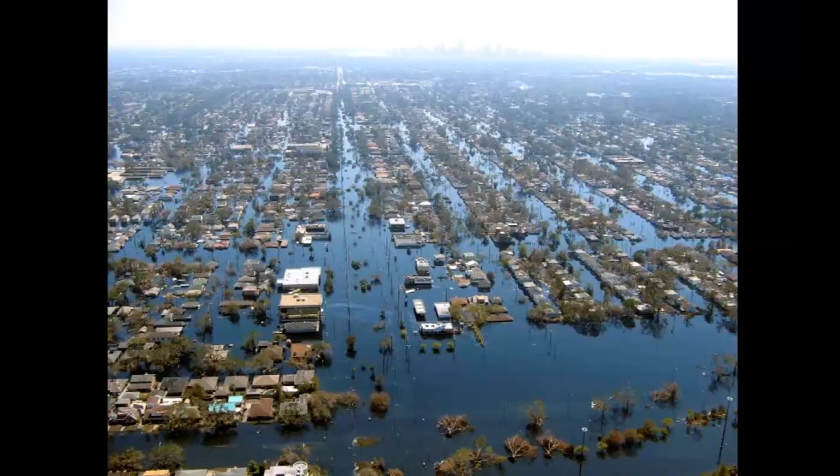Just as way of background, I was one of 3 full-time faculty at the LSU Hurricane Center in Baton Rouge when Hurricanes Katrina and Rita hit. And I was there doing research on wind effects on buildings, but by the time I left LSU 2 years later, I was mostly working on flood mitigation.

So let me start by defining amphibious architecture. What is it? Well, it's a term that refers to buildings at this stage, mostly small houses, that sit on dry land like an ordinary building, except when a flood happens, they float on top of the water. They go straight up, sit on top of the water as long as it's there, and then come straight back down. And they do this by having a buoyancy system under the house.

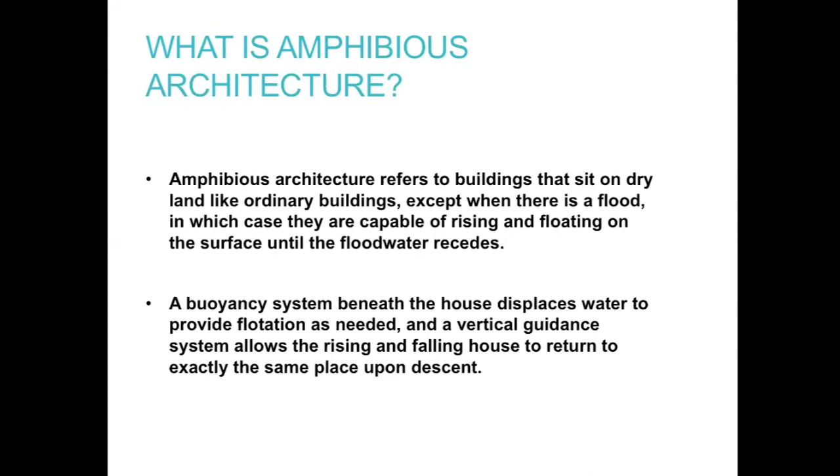And buoyancy system just means that it's something that will displace water in order to lift the house and keep it on top of the water. And they also have a vertical guidance system, which is something that only allows the house to go straight up and then straight back down. So it can't go sideways, it can't move anywhere off of its footprint. It just goes straight up and comes straight back down.

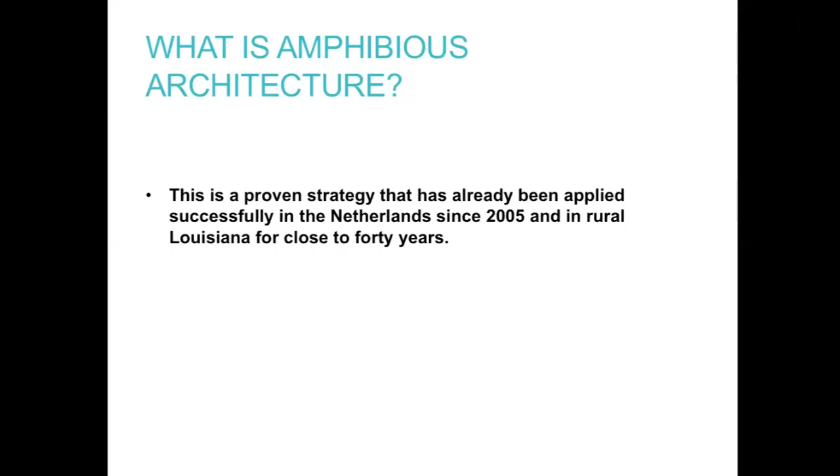So we have seen amphibious construction in the Netherlands, quite well advertised since about 2005. And under the radar, almost completely under the radar, there has been amphibious construction in rural Louisiana for close to 40 years. And I'll be showing you some examples of that in a few minutes.

And one of the things that I particularly like about this mode of flood mitigation is that it works in synchrony with the natural cycles of flooding. It doesn't try to stop the water. It doesn't try to make the water do anything other than what the water wants to do. And so it allows Mother Nature to do what Mother Nature wants, and we do the adaptation rather than asking Mother Nature to adapt to us.

So in that sense, it's a much, much more sustainable solution than what we often use now, such systems as dams and levees and dikes that change the way the water moves.

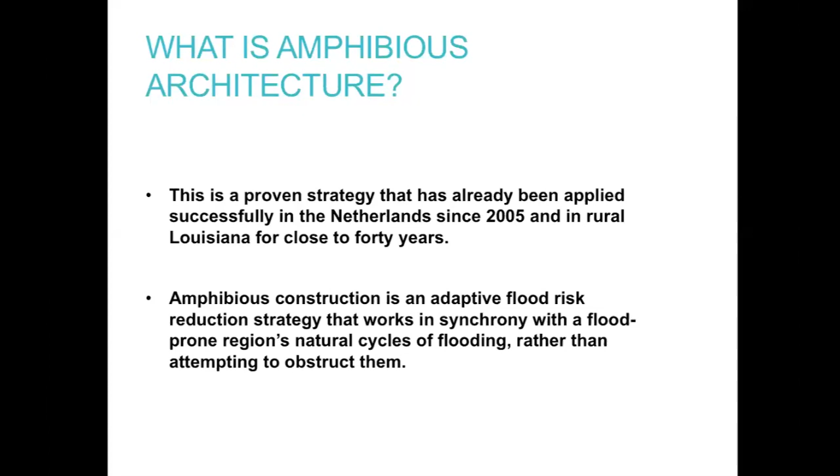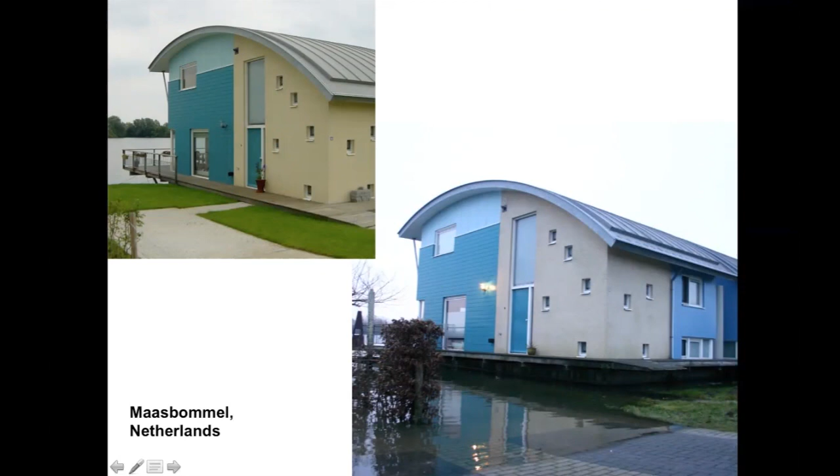And so here's an example in Maasbommel: on the left, the normal condition, and on the right when there's a flood. And you can see by the change in elevation here, this is the walkway. There's that walkway that's right there. And here it is lifted up, and it connects down here because the water has come up to this level and the house is floating.

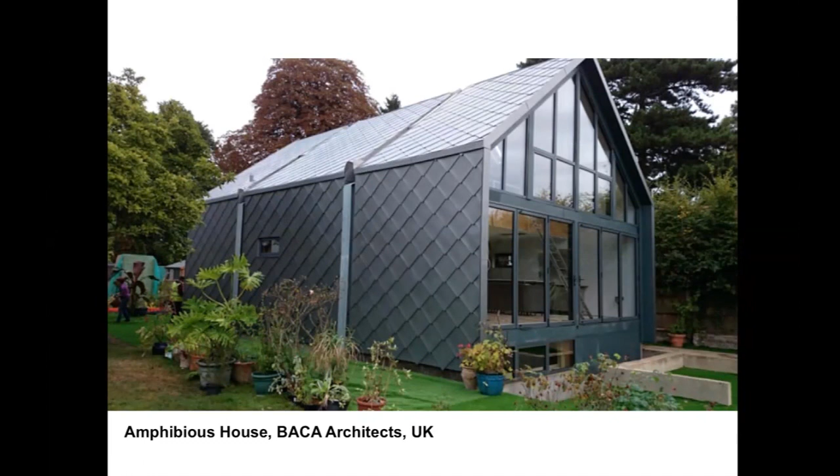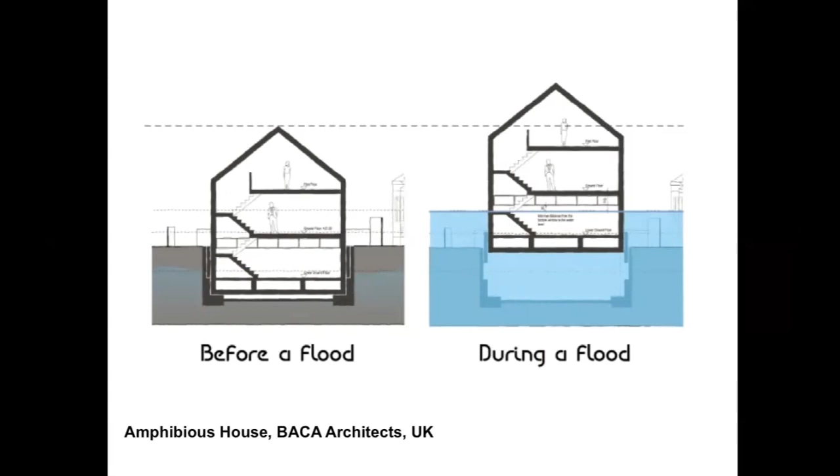This is another amphibious house, a very recent one in England on the Thames River, designed by BACA Architects in London. And this is a diagram that shows how it works. Basically, it has a double basement, an outer basement that holds back the soil and creates the pocket in which the inner basement sits. The inner basement provides the buoyancy, and when the water comes, it lifts the inner basement of the house and the house with it until the flood recedes.

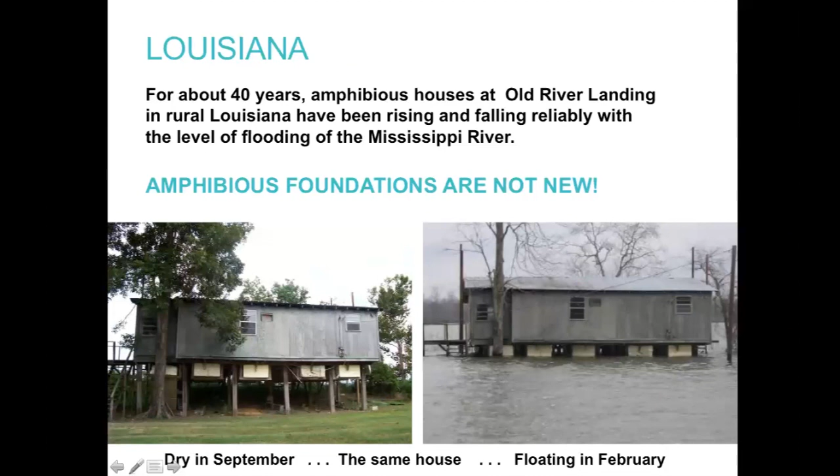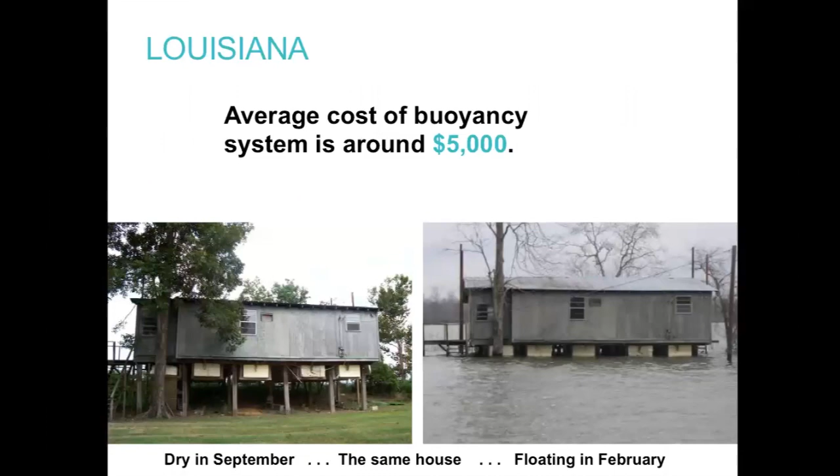The one very, very important point is that these retrofits are not expensive. This is a do-it-yourself installation. It's not fully engineered, it's not code compliant, and it's not necessarily very pretty, but it works and it's inexpensive. Here's another one of these installations. The name of the lake is Old River. So here's Old River back here under normal conditions, and here it is as the flood's coming up.

And I like this shot because it shows how the system works. There's poles in the ground and a sleeve that comes out from underneath the house and goes around it, and that slides up and down. And these are the buoyancy blocks. They're just big blocks of styrofoam, which you can't use every place because styrofoam will dissolve in the presence of solvents, gasoline products. But this lake is clean, and the people have had no trouble with the unprotected blocks of styrofoam. Some of these houses have been functioning reliably, as I said, for 40 years.

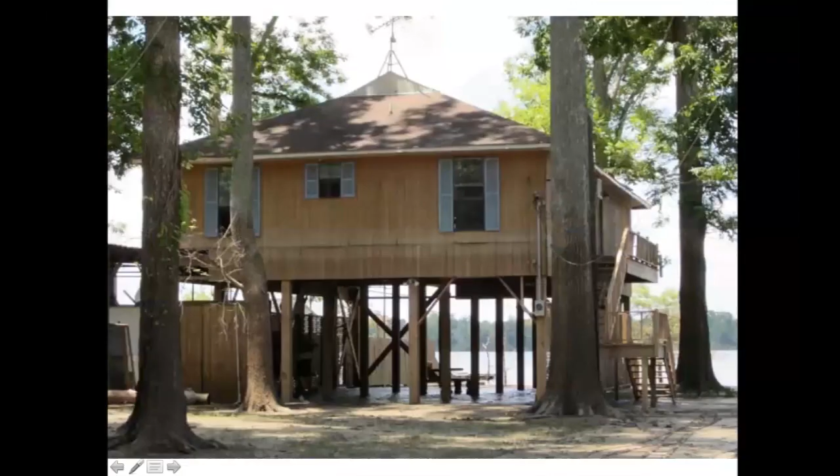And in the spring of 2011, there was a much larger flood, higher flood than anticipated. So this house is the one in the background in the previous slide, and this is the 11-foot BFE, base flood elevation, but the flood came up to 15 feet. So this house was very, very badly damaged, as was this one. So here's the water line on this house: even though it was up on stilts to the level specified by FEMA, it still sustained this very high level of damage.

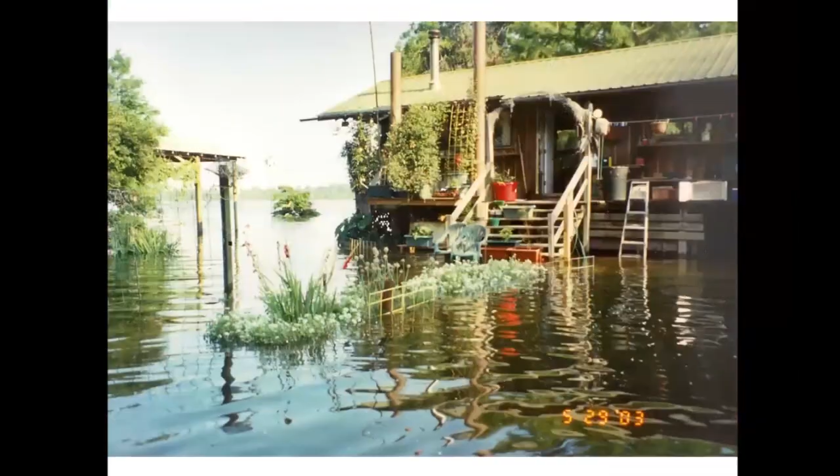And you can see in a flood how high up Buddy's house is floating, because only this much of the posts is showing. So there's quite a lot of flooding, and Buddy is sitting pretty there. And here's another view. So this is the lake in the back that has turned into a much, much larger lake. And the water does the work of protecting the house. The water is lifting the house, and that's conceptually one of the things I very much appreciate about this solution.

So what is the Buoyant Foundation Project then? The Buoyant Foundation Project is the name of the nonprofit organization that I set up as the umbrella research organization for the work that I've been doing for the last 10.5 years on developing retrofitted amphibious systems for existing houses, for places where people are already living somewhere, they have a community, they don't want to be forced to move. And so I took the example of what people have been doing in Old River Landing and fully engineered it and made it code compliant, and also made it more aesthetically appropriate for an urban environment.

So the Buoyant Foundation Project is my work, and it is specifically for retrofitting, and it works most easily on a pier and beam house, which means it's a house that's already elevated a little bit off the ground, sitting on masonry piers.

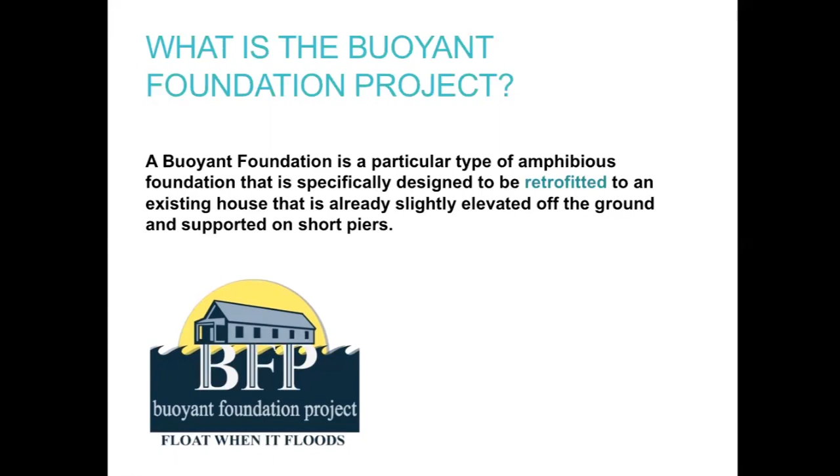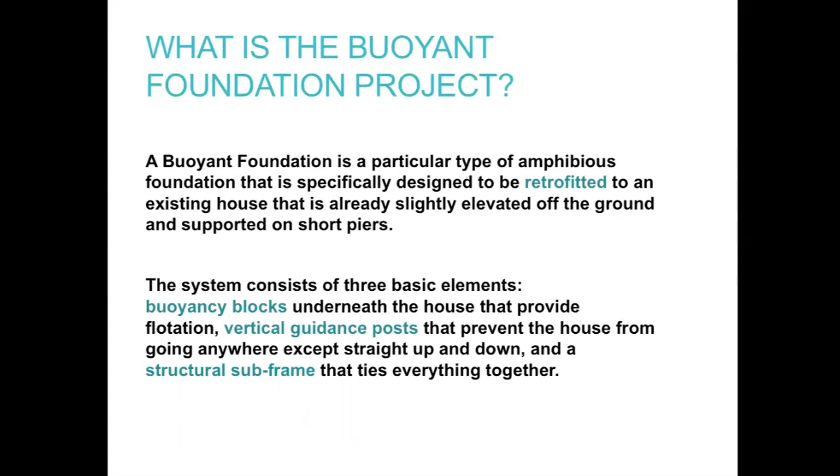There are three basic elements. There are buoyancy blocks underneath the house to provide flotation, and they can be anything that will displace water. They can be blocks of styrofoam, they can be empty barrels, they can be pontoons, they can be pre-manufactured purchased dock floats; anything that will displace water to provide enough buoyancy to lift the house will work for buoyancy blocks. And then, of course, we need some sort of vertical guidance system, and then a little bit more structure to tie everything together and attach the house to the vertical guidance posts.

So one thing that's very important to say about buoyant foundations is, as we are designing them now, they are not intended for places where there are waves or where the water has a lot of velocity, where you have high-speed water. I believe those solutions will come in time, and I have, in fact, been working on some, but for the time being, we are not suggesting that this is a good thing for places where there is a lot of lateral movement in the water.

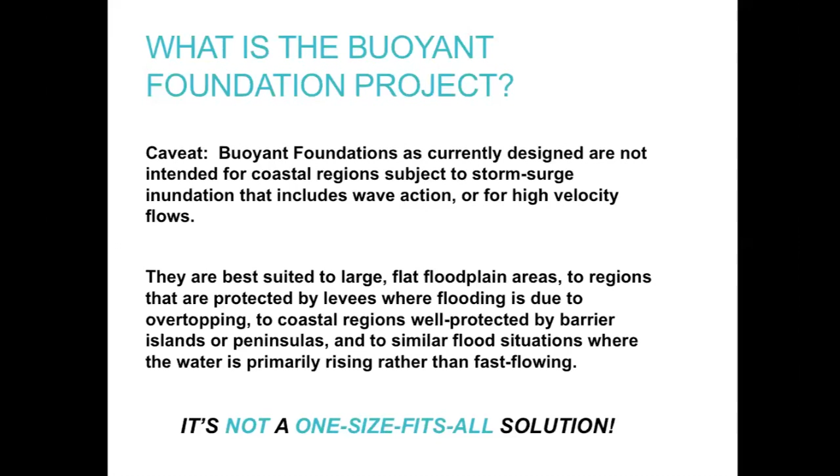So that means we're looking for floodplains, areas that are protected by levees that might overtop, where there are barrier islands, and places where the speed of the water is diminished. So it's important to say that this is not a one-size-fits-all solution. It doesn't work for every situation, but for the situations where it works, it works extremely well.

So what are some of the advantages of buoyant foundations? Well, they temporarily elevate the house. They take it up exactly as high as is necessary, but otherwise the house stays close to the ground, so it's not disruptive to the lifestyle. It's also less susceptible to wind damage, because as you move any sort of structure higher above the surface of the earth, the speed of the wind picks up. So you put your house up on stilts, you're going to be more likely to lose your roof than if your house stays close to the ground.

Also, because it's a flexible system, it can take soil subsidence and rising sea level in stride. It's a very, very good climate change adaptation strategy, as well as the types of flood mitigation that we've been seeing for decades. The house looks essentially the same as it did before. Very slight change in the appearance. So it preserves traditional architecture. Your neighborhood retains its original character. This is a very, very good solution for historic properties.

And the best part of all, it's really cheap compared to permanent static elevation. Generally about 30% of the cost of putting your house up on stilts. And this is because with a retrofit of an older house, you can do what's called grandfathering in the current foundation, just adding the vertical guidance posts that take all of the lateral load, anything that's pushing horizontally on the house, like the force of the flowing water or wind forces. That gets carried by the vertical guidance posts, and so the existing foundation can remain to carry the gravity loads. Whereas with permanent static elevation, the entire gravity load-bearing structure has to be replaced.

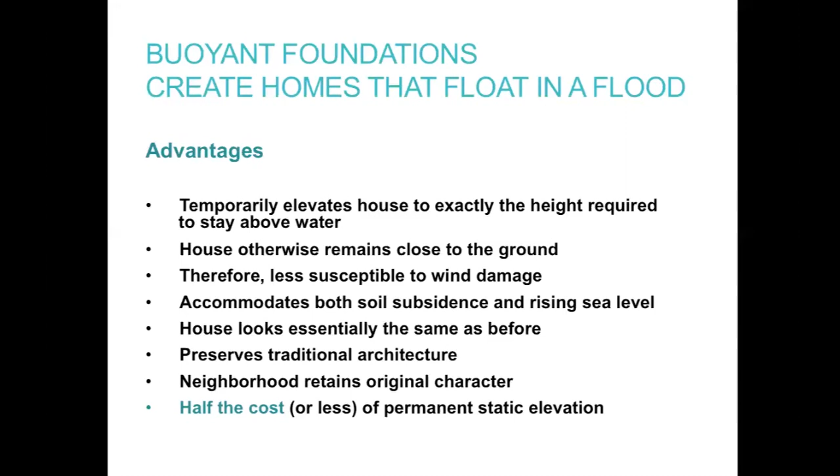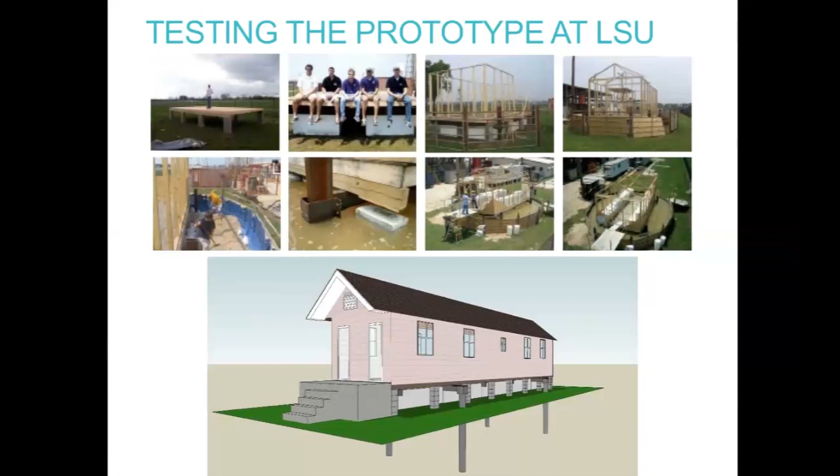This is a diagram of the final system as it might be applied to a shotgun house in South Louisiana, showing the vertical guidance posts, and now they're designed to telescope out of the ground. They pull out of the ground from the top. There's an outer sleeve and an inner pipe, and the inner pipe pulls out of the top, kind of like the old-fashioned car antenna or the handle on a rolling suitcase, and underneath here you can see the blocks of styrofoam. And then we put a screen around it, both to protect it, to help it visually, but also to make sure that waterborne debris does not settle underneath the house.

And so here's our test that we were doing, and we used barrels full of water to simulate the dead load, the weight of the house and roof and walls, the structure itself. And then the sandbags are what we call live load, and that is the equivalent of the people and the contents and the furniture. And we looked at a situation where if most of the live load were along one side, the side of one wall, how much would that tilt the house? So we've got a lot more sandbags piled up here, and we were testing the stability, and it did just fine.

So I'm going to show you a little sort of flip card video here, comparing these three situations. So the typical shotgun house, these are long, skinny houses. So this is just the front elevation. So typical shotgun house sitting 3 feet off the ground on piers. What happens if it's elevated to 8 feet, and what if we put in a buoyant foundation with the buoyancy blocks and the vertical guidance posts.

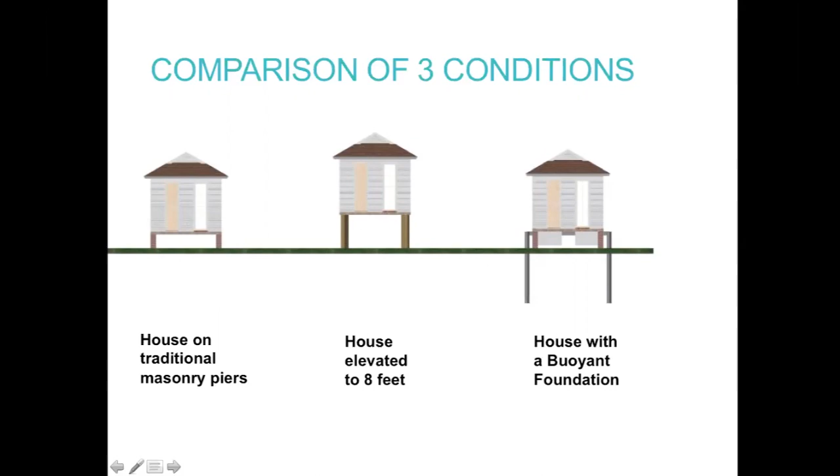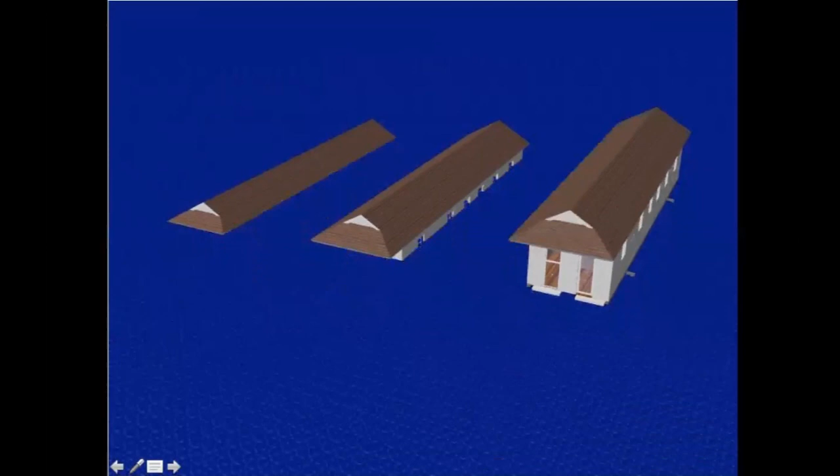So here's the same three situations in a different view, and now we're going to add water. There we go. So which house would you want to live in? The conclusion is, why fight floodwater when you can float on it?

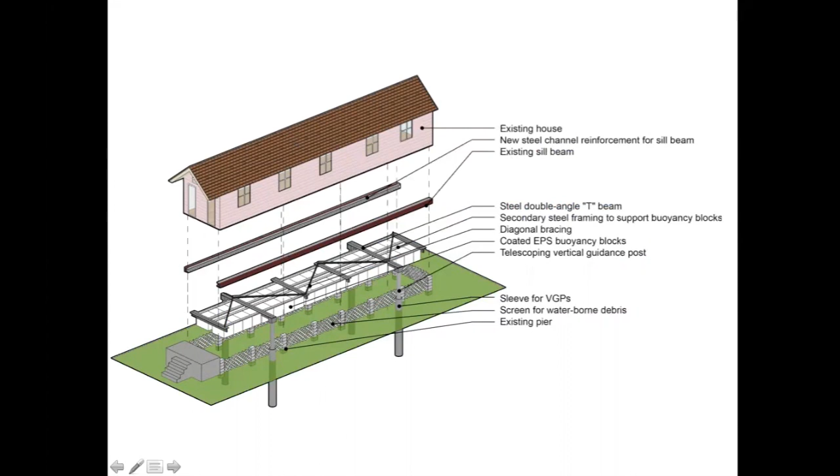So this is a type of drawing we call an exploded axonometric, which pulls the house apart and shows what the different components are, including this screen around the bottom to keep out the waterborne debris. And now I have a real animation, and it shows how the components get put together. And I'm afraid my animation isn't working. There we go.

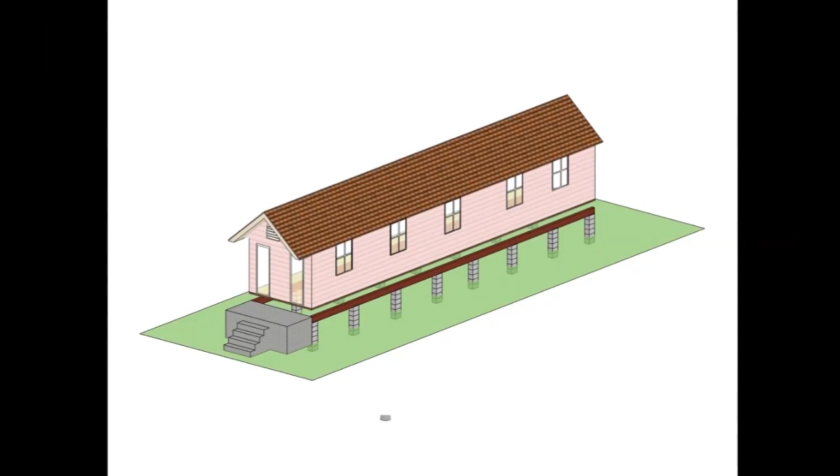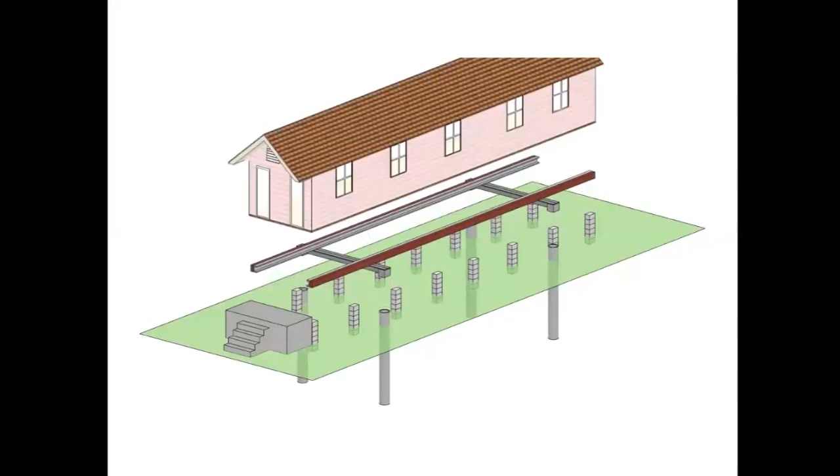So the house goes up, the vertical guidance post sleeves go in, that's the reinforcement for the existing sill beams, and then the cross beams, and lifting that up so you can see what goes in next. And then these are more transverse supports and bracing to hold the buoyancy blocks. And that's the inner pipe of the vertical guidance posts going in. There are buoyancy blocks. Now we have the screen around the base.

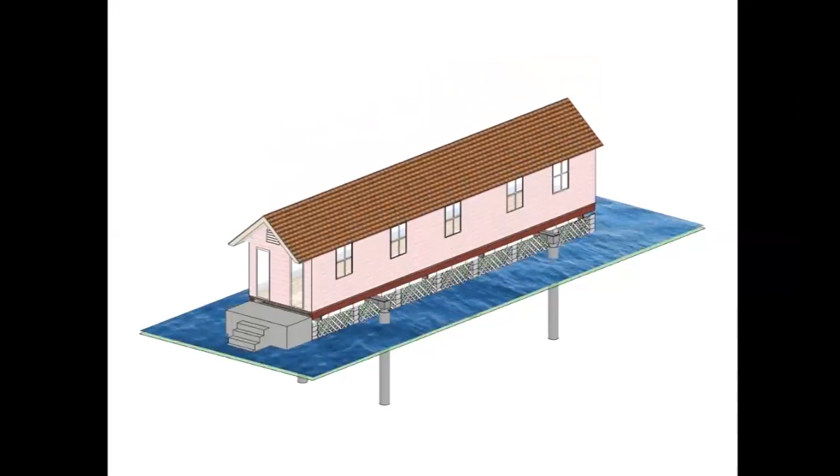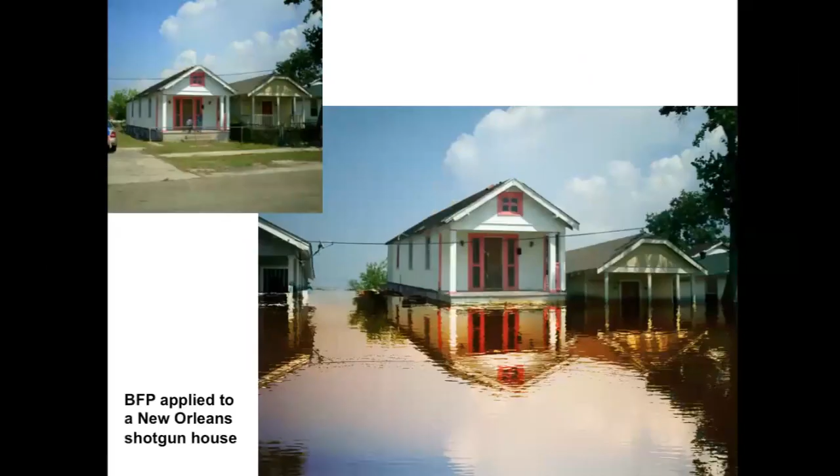And now we add water. So the screen at the bottom keeps any debris that's tumbling along the bottom of the water, along the ground, from depositing itself under the house. And this is a render of what it might look like on a typical shotgun house in New Orleans.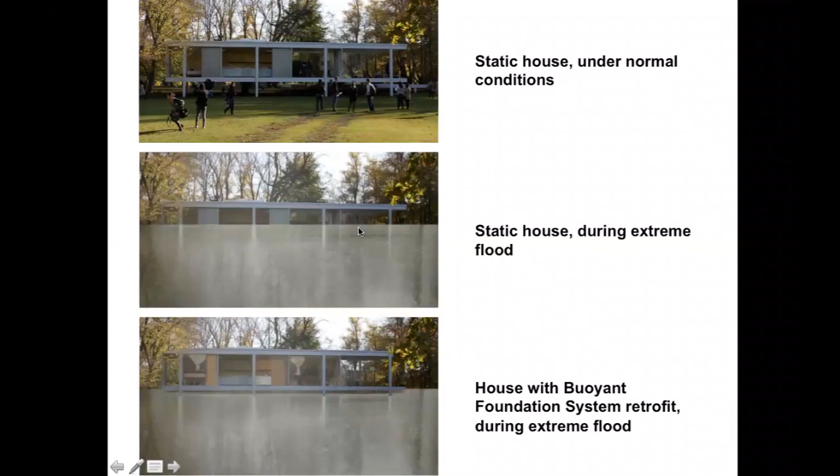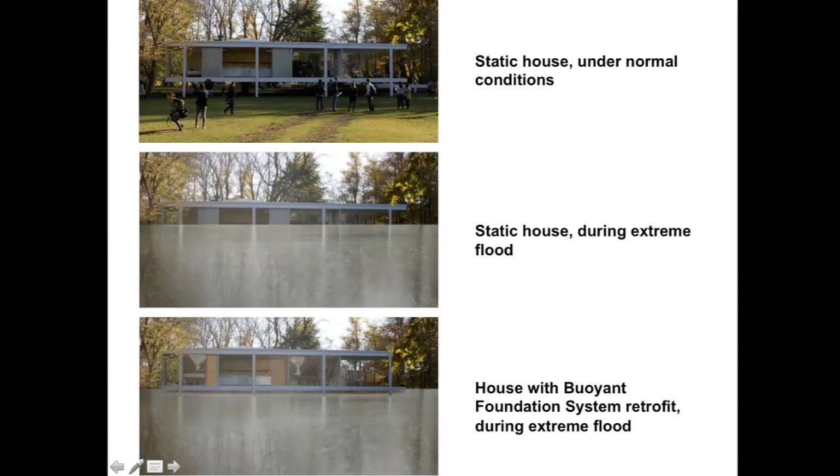And so what could we do? Well, working with my students, they're very good with Photoshop. So here's the ordinary condition, and this is what would be if the house were not able to float and we had an extreme flood. But if it were provided with a buoyant foundation system and that same flood came, the house could float up like this, and there would not be damage to the house.

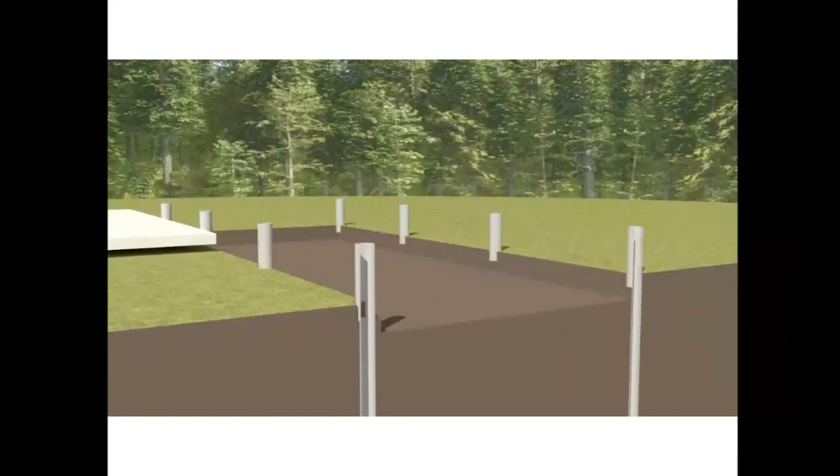So here I have another animation for you. So digging the pit and putting in extensions of the existing columns. There's the buoyancy and the structural system over it. Here come the telescopic poles, and the house comes back down and everything gets fastened together, and then the water comes.

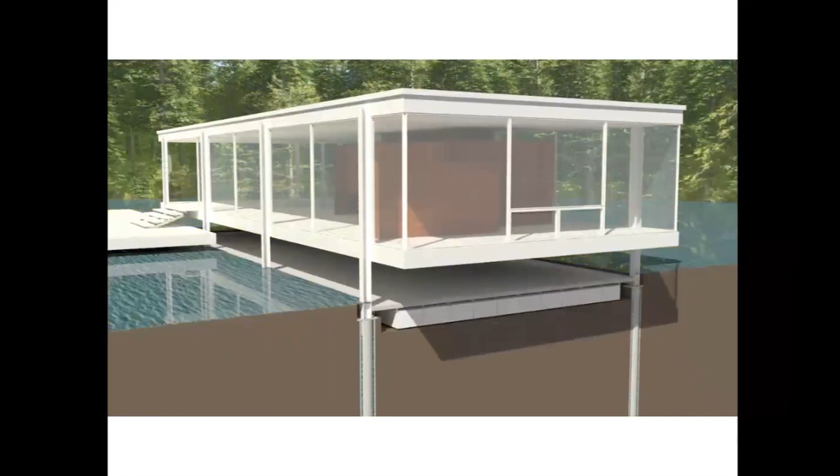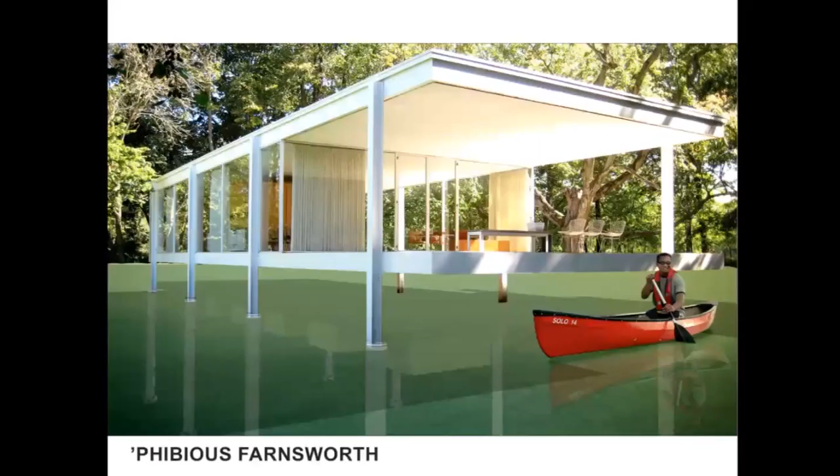And it floats up and sits on top of the water, and then when the water goes away, there should be mud on the entrance pavilion. We got the mud on the grass, but not on the entrance pavilion. And this is a render of what it might look like, and a little canoeing adventure on the flood.

So to finish up, I want to tell you about the first International Conference on Amphibious Architecture, Design, and Engineering, ICADE 2015, that we held last August in Bangkok, Thailand. We had 60 people from 17 different countries, and from all of North America, there were only 3 people there, myself and the 2 people that I brought with me. So we decided that the next ICADE needed to inform North America and try to bring North America up to speed.

So we are holding the second ICADE conference, International Conference on Amphibious Architecture, Design, and Engineering in North America at my home university, the University of Waterloo in Ontario. It's about an hour's drive west of Toronto and 2 hours north of Buffalo. And it's going to be the end of June of 2017.